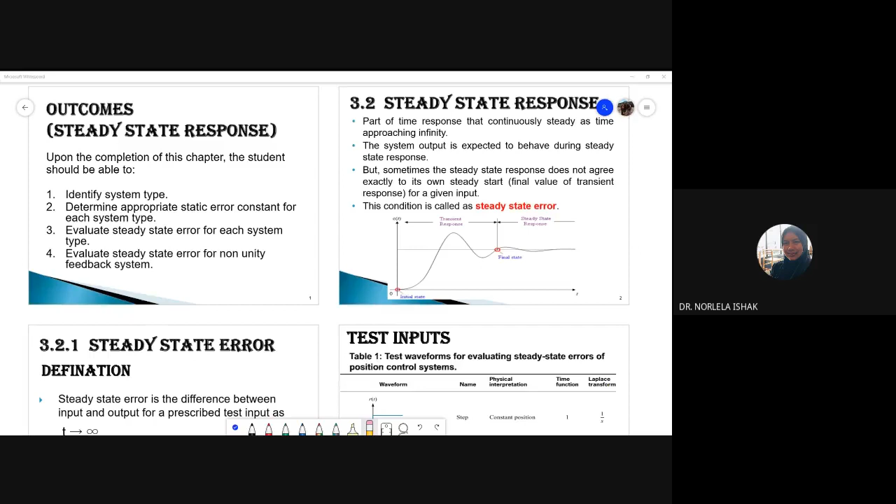Okay, who remembers? What's the parameter we're going to discuss for the second order? Mio, do you remember? Dan, remember? Nani, remember? What parameter do we evaluate from the second order? What's the parameter we evaluate from the second order?

You have to know the settling time, the rise time, the overshoot, the maximum peak, okay, and etc. That's the parameters we're going to evaluate from the second order output response.

Okay, now when we already analyze the transient response part, you have to know the error. Okay, you have to know the error.

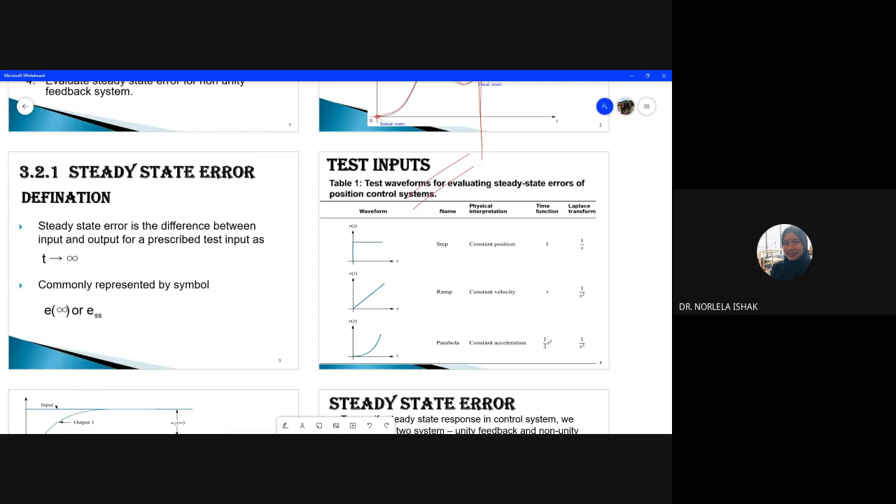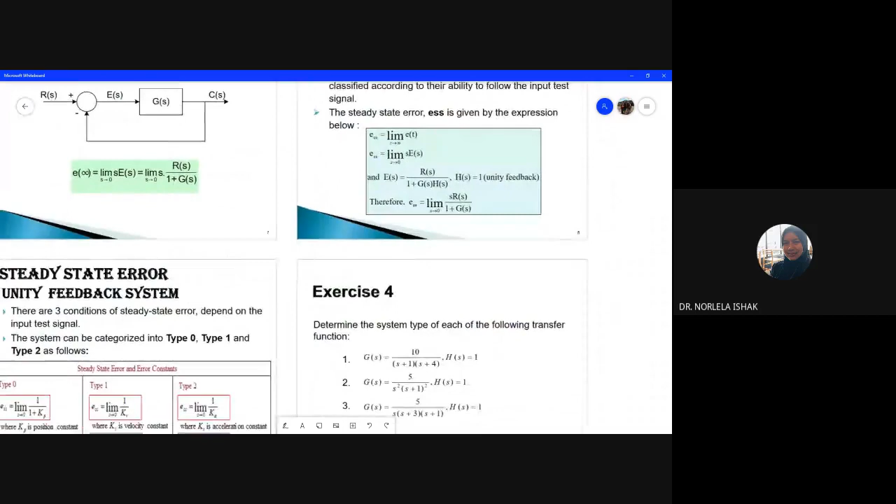Okay, from there, what you should be able to learn from steady state error is you have to identify the system type. To identify the system type, you have to represent your system based on this block diagram. You have to represent your forward gain. What is your forward gain?

This is your forward gain. Okay, this is your forward gain, G(s). Okay, this is your forward gain. So you have to represent your forward gain similar to this general equation.

Okay, so meaning the denominator, you have to represent your system based on this denominator. You have to factorize it. You have to factorize in terms of pole P1, pole P2, and so on. You have to bracket each pole, meaning you have to factorize.

Okay, let's say you have this kind of denominator. You have to factorize it - what is pole 1, what is pole 2, and what is pole 3. From there, you see s to the power of n. What is the n here? That's how you define the system type, right?

Okay, so meaning from slide 17, how do you define the system type? It's the value of n in the denominator. But you have to bear in mind, before you define the value of n, you have to factorize your equation from the denominator.

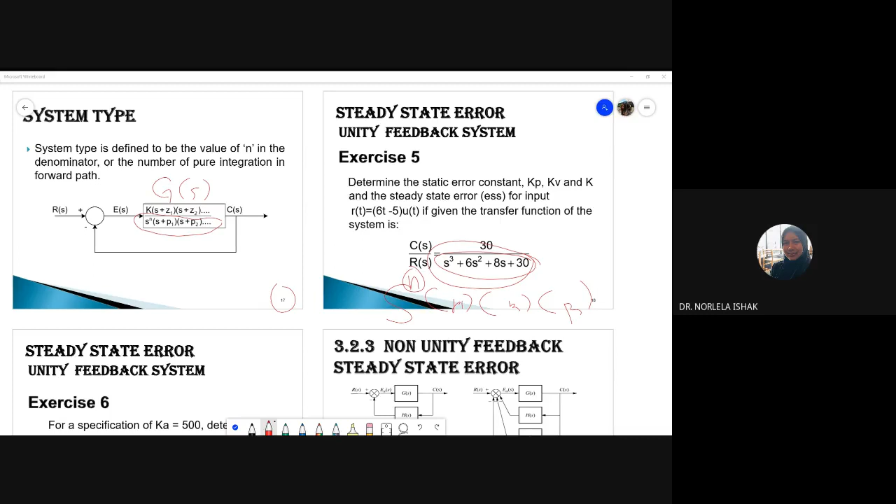Okay, so this is just a summary of what you should know from steady state error. The first one, now you know how to define the system type based on the denominator. But before you define the system type, you have to factorize the denominator equation.

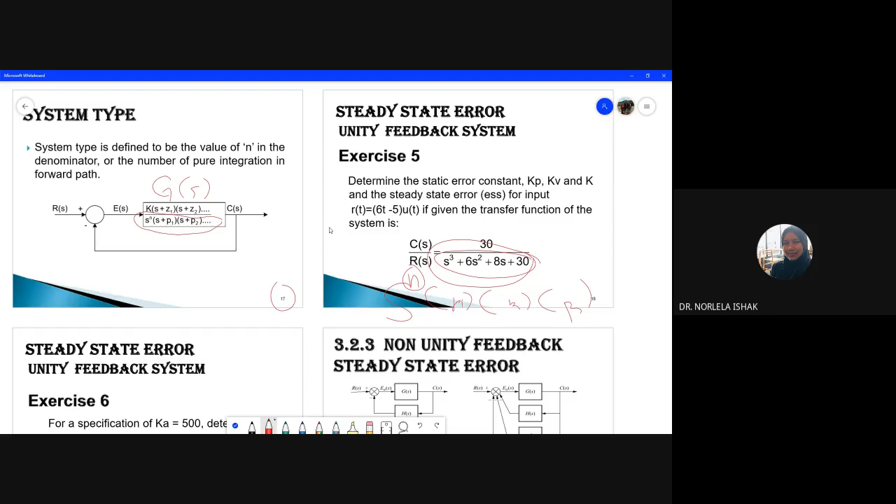Once you define the system type, let's say we already know how to define the system type, whether we have three system types: n equal to 0, n equal to 1, or n equal to 2. We have three types of system type based on the denominator of the forward transfer function.

Once you know the system type, you can determine your static error constant. This is your static error constant. And once you get the static error constant, you can evaluate your error.

Before that, we have two conditions to evaluate our steady state error: non-unity feedback and unity feedback. We have two conditions of closed loop system.

Meaning this is our system, this is our block diagram. This is our input, and this is our output, and this is our forward gain, and this is the feedback — unity, meaning unity when H equal to 1, or non-unity condition when feedback is not equal to 1.

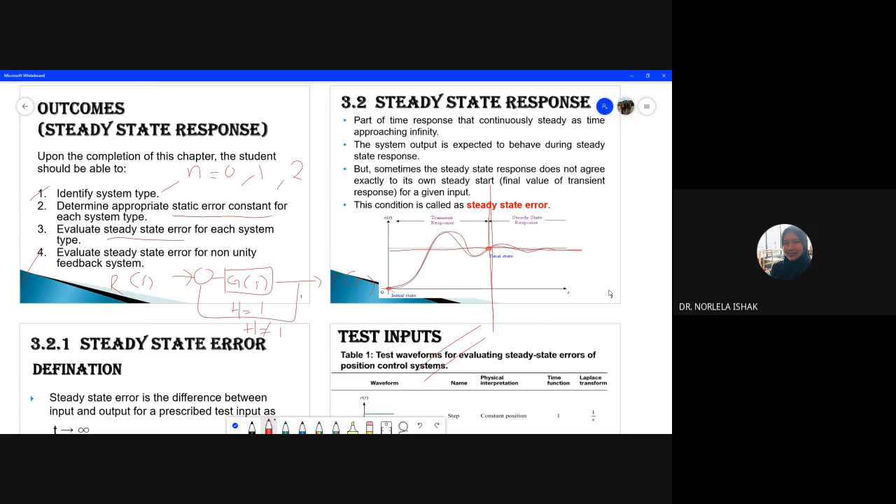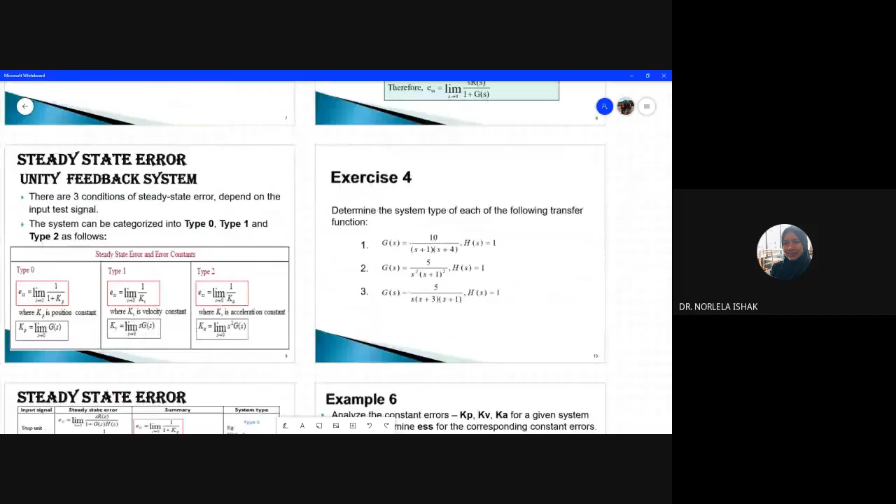So where are we? We're talking about system type: 0, 1, or 2. Once you already know your system type, you can refer to our standard table. This table you can see from the textbook.

This is a standard table. This table shows the relationship between input — we have three inputs in this column — for our input, we will deal with three types of input: step, ramp, and parabola. And then this is type 0, type 1, and type 2, meaning s to the power of 0, s to the power of 1, and s to the power of 2.

This is your n. N represents your system types. Now what is the error constant or steady state error? So you can see from this table, they want to show the relationship if the system is type 0.

If the system is type 0, you can see what is the static error constant and what's the error. Error meaning steady state error, ESS. This is ESS, steady state error.

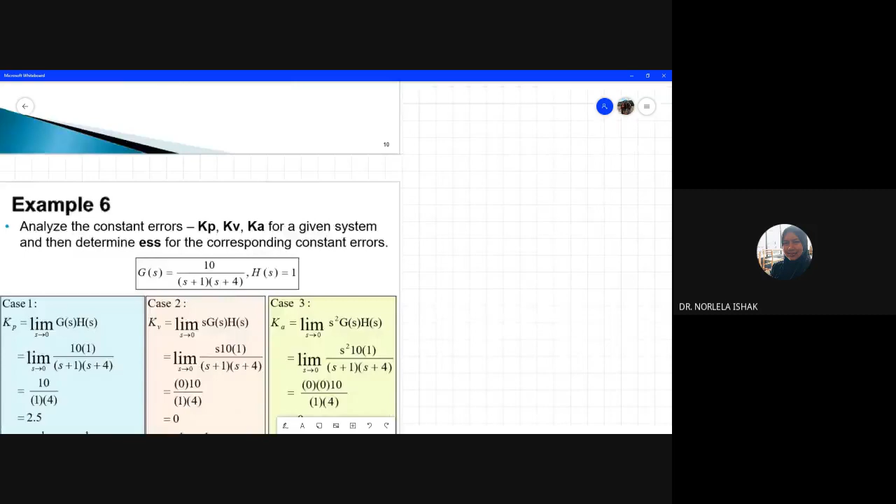What's our error equation? Okay, this is our error equation. And H equals unity feedback. So we substitute into the final value theorem, and we can get this one.

Meaning ESS equals limit S goes to 0 of ES. This is RS over 1 plus GS. R is our input, depending on whether our input is step, ramp or parabola.

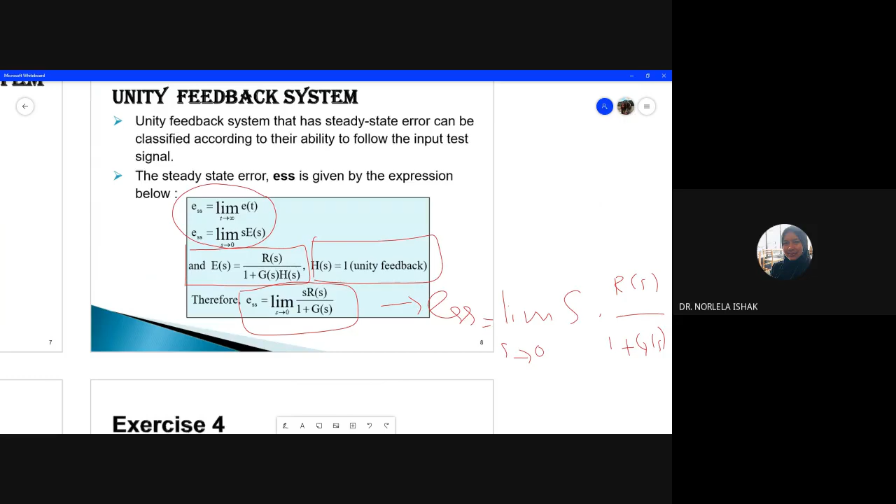Actually, in the second recorded video, I already showed you when we replace or apply the value of R, whether it's step, ramp, or parabola, which is S to the power of 3. We substitute R, whether ramp or parabola, so we can get the equation for error for each input.

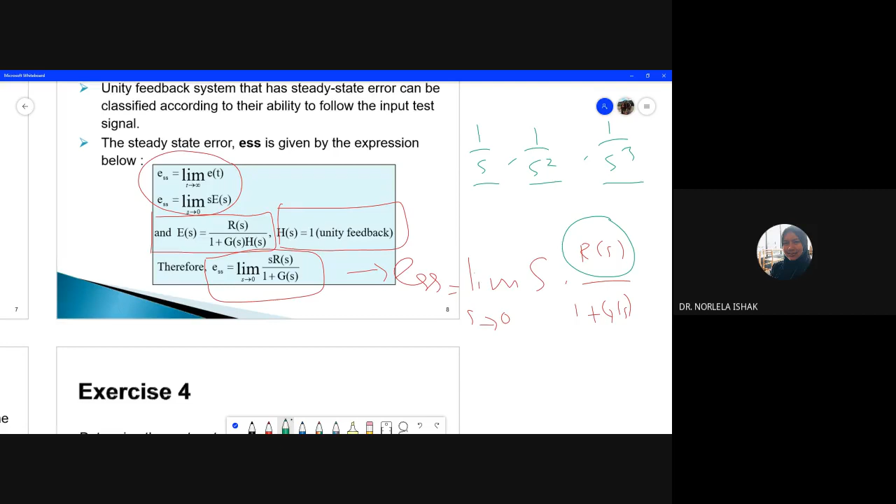You can see that from our recorded video, you can go back through it. Madam already discussed and showed how our steady state error looks like when we apply input with step, with ramp, and with parabola.

So just now, where is our table? From here you can see for type 0 - just now we were talking about type 0. For type 0, only input step will contribute the constant value, Kp.

Kp is a position constant for unit step. Kv is a velocity constant for ramp input. Ka is an acceleration constant when we apply parabola input.

But if the system is type 0, error will be contributed when we apply input step. So now let's say Kp - you already calculate the value of Kp, right? So meaning when you calculate the value of Kp, we can calculate the error. This is the formula for error. First you calculate your Kp, and then once you get the Kp, you substitute into this equation.

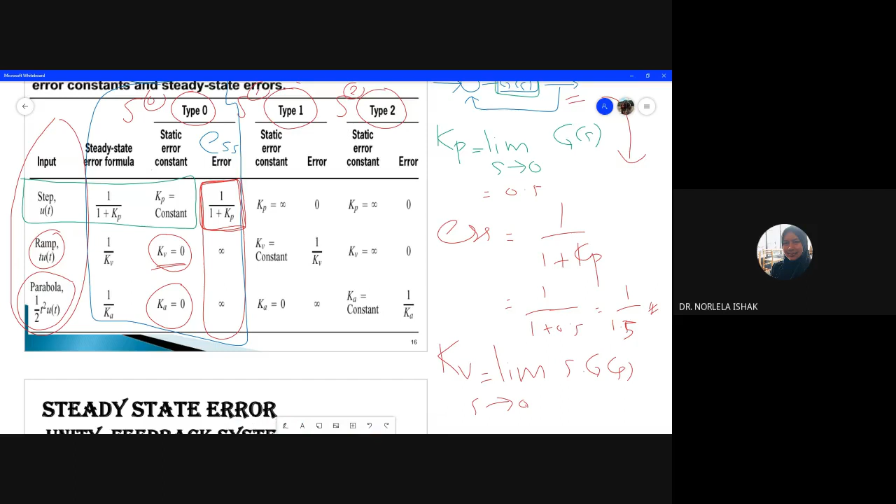Okay, let's say for type 0 and our input is a ramp. When you calculate KV, the formula for KV is SGS. From here you can get the value of KV. KV equals 0. And when you substitute into the steady state error equation for KV, ESS equals 1 over KV. If KV equals 0, of course you get infinity error.

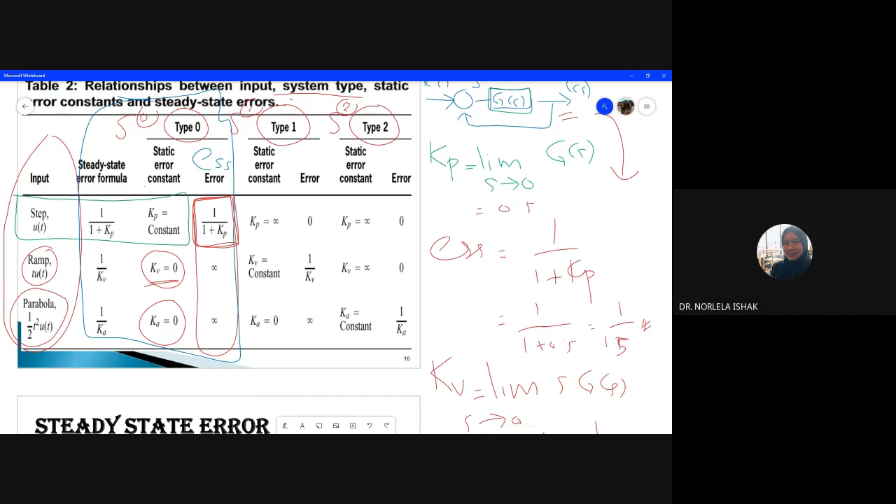Same goes for KA. When we apply input parabola into a type 0 system, meaning if we apply parabola input to type 0, KA you can get 0. You substitute into the steady state error for KA, which is 1 over KA. 1 divided by 0, you get infinity here, for both conditions.

So for type 0, only step input gives you a finite error value; the rest gives you infinity. Same goes for type 1 and type 2. For type 1, error is constant when input is a ramp, and the rest you get error 0 or infinity. Same goes for type 2, meaning n equals 2.

The constant error comes from the parabola input. If the Ka equals a constant, you can get a certain number, so from there you calculate your error, meaning 1 over Ka gives you your error. This constant gives you the number here, for the error when we apply input parabola.

That's the way to read the relationship between input, system type, error constant, and steady state error. This is how this table summarizes or compiles the information to show the relationship between the four parameters.

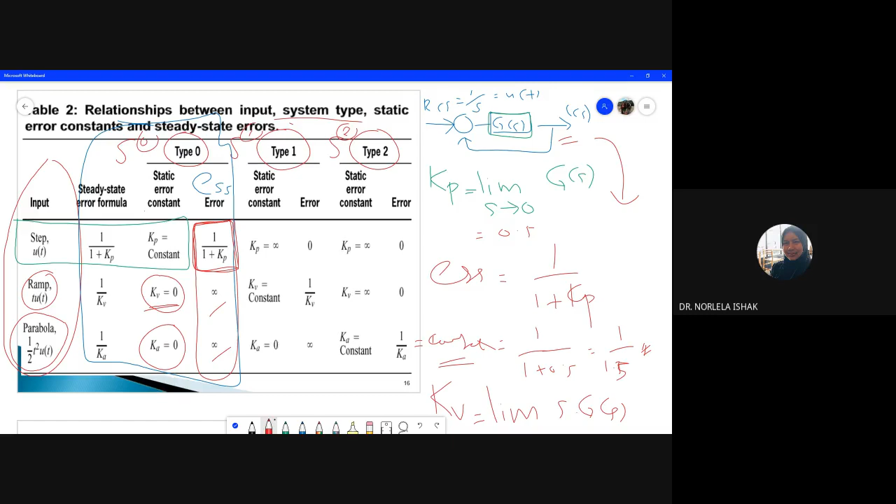Guys, any question? No, madam. Okay, good.

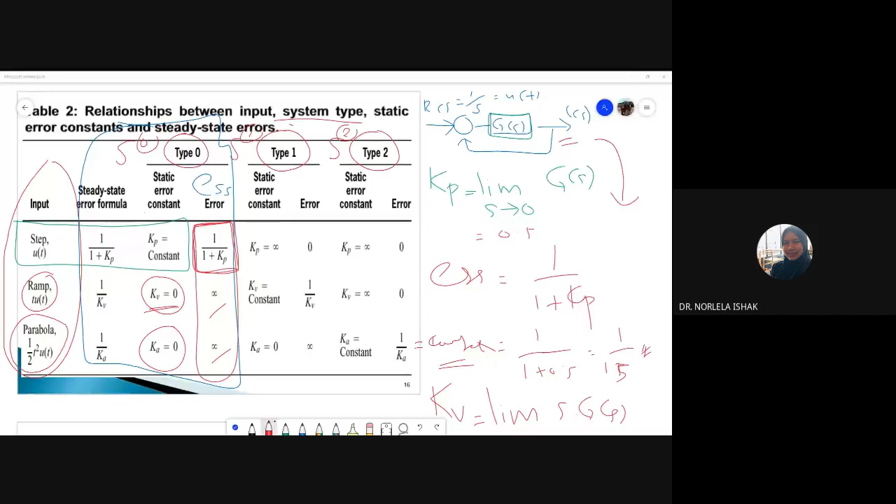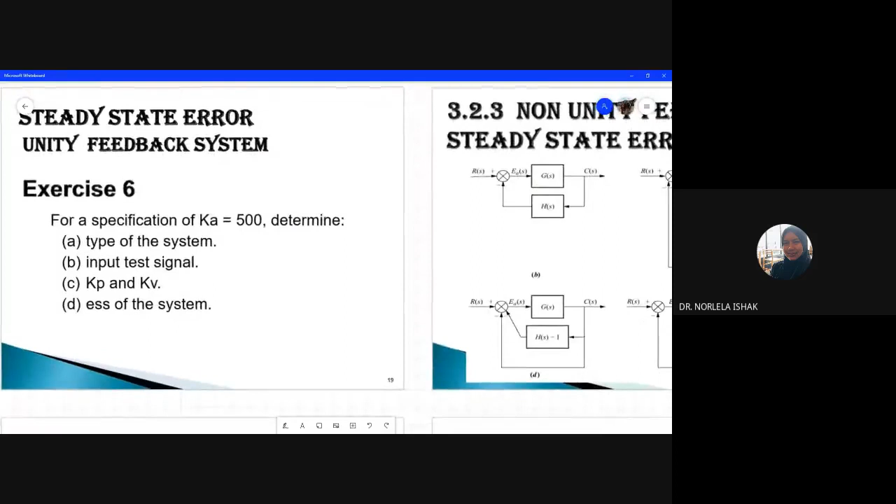Okay, anything I want to share? Any question? Okay, let's say from this one, exercise number 6.

KA equal to 500. Can you determine the type of the system? Who can guess? If KA is given as a constant number, you still remember from the previous table, only one of them, whether type 0, type 1, or type 2, will contribute a constant static value, whether KP, KV, or KA.

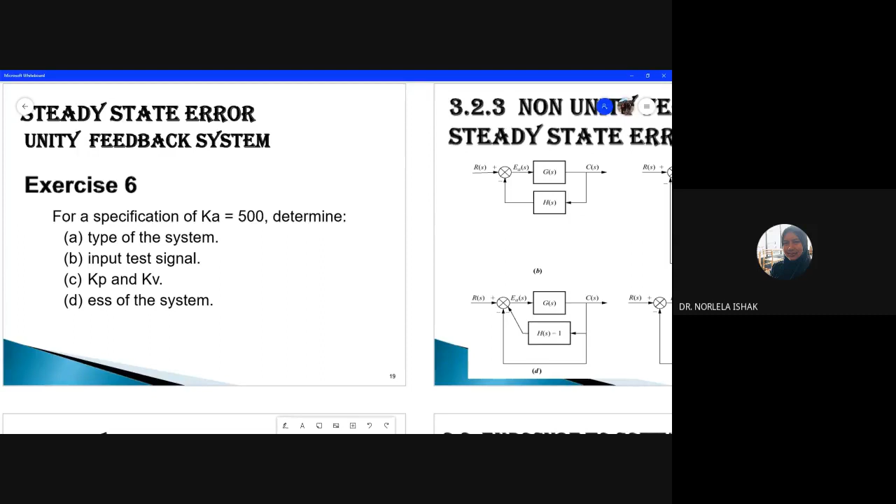For this exercise, KA is a constant number. Can you determine what is your system type here? If KA is constant, it's type 2. Type 2, yes, good. Okay, can we come back to our table here?

So just now, KA has a number. If you see type 0, KA equal to 0. For type 1, KA equal to 0. For type 2, KA has a constant number. Of course, the system is type 2, right?

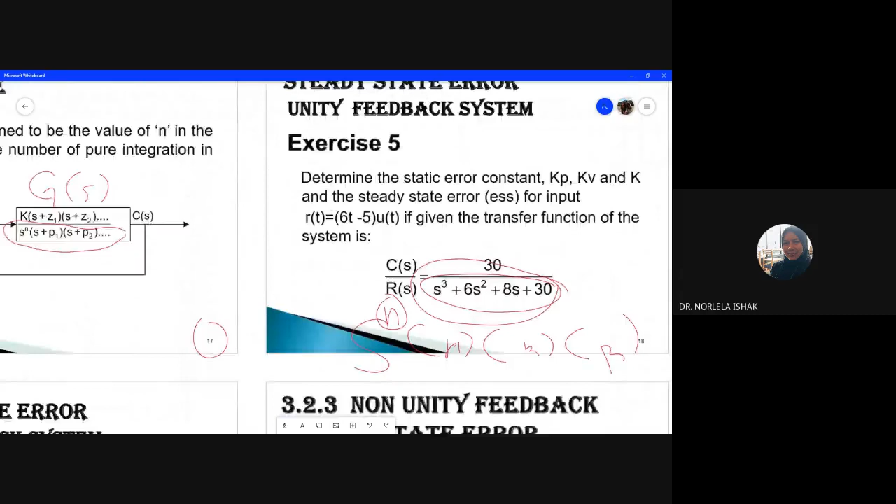Okay, good. And then the next question, what is the input test signal for this system if KA equal to 500? Parabola. Yes, very good, parabola input test signal.

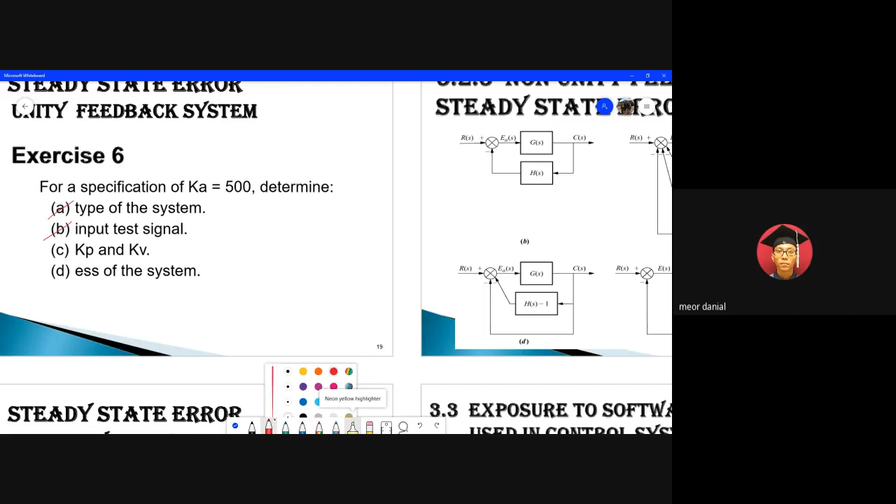So meaning we have a type and we have the input signal. Okay, done. How about the value of KP and KV? When n equal to 2, this is the input, a parabola. How about the value of KP and KV?

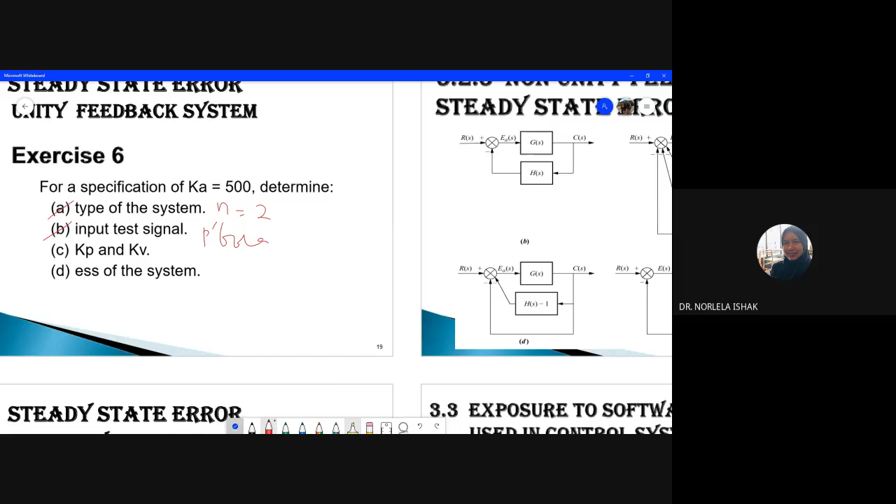Infinity? Okay, let's see back from our table. Type 2, KP and KV is infinity. This is the information from this one. KP and KV is infinity, so of course the error is 0.

Okay, the last one, number D, what's the error of the system? ESS meaning is the steady state error. What's the error for this system? 1/500. Okay good, ESS equal to 1 over KA, meaning 1 over 500.

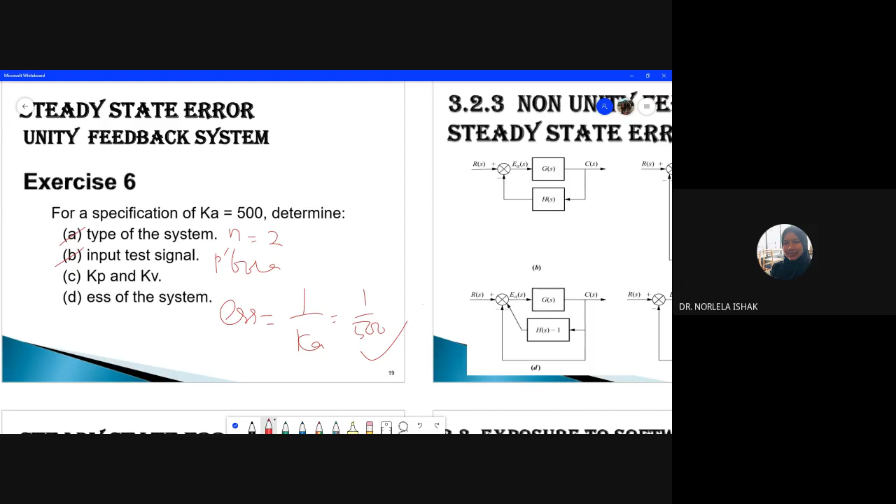This is the error of the system. That's how you should read that summary table, and that table serves as your benchmark. Once you complete your calculation, you can refer back to that table to verify whether your calculation is correct or not.

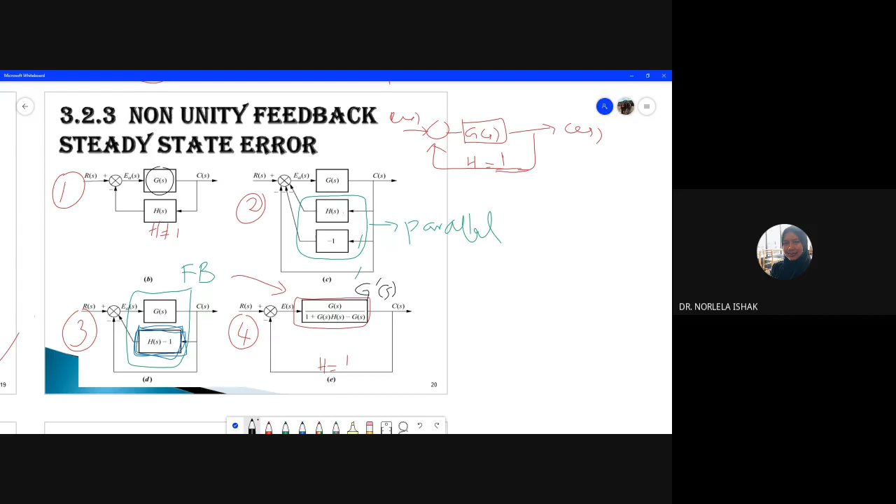This one, madam labels with G prime. This is our G prime. I want to show the difference between this G and this G prime. G prime is after we convert non-unity, G prime is after we convert non-unity into unity feedback. So meaning from here...

We already get our new block. We convert non-unity into unity, so we can get the new one. This is your output, we get G prime here, our new forward gain. This is our old forward gain in what condition? In non-unity feedback. And then now we go step by step until you get this G prime.

So what's the formula for G prime? From the calculation, you can get G prime equal to, inside the box, G, this is your old forward gain, over 1 plus G S H S, minus G. Yes, this is the formula how to get G prime.

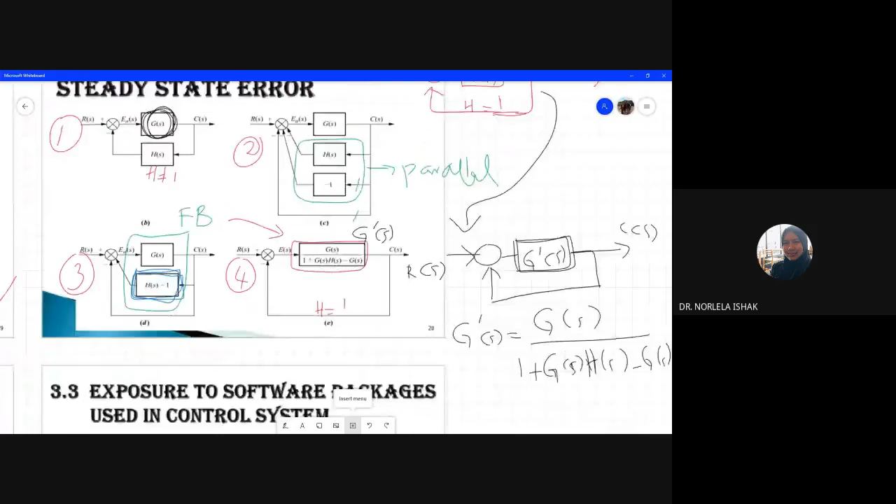This is exercise 7, exercise for non-unity feedback. Hopefully everybody tries it. This is madam's example, meaning H, non-unity feedback system.

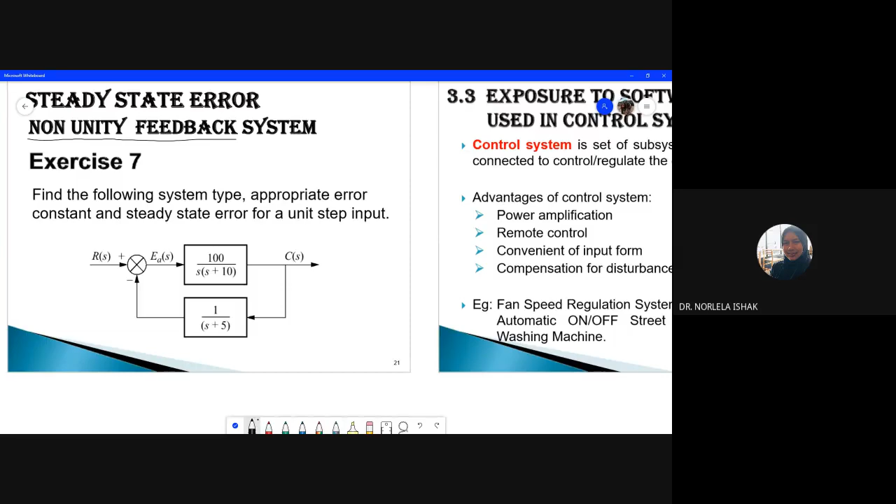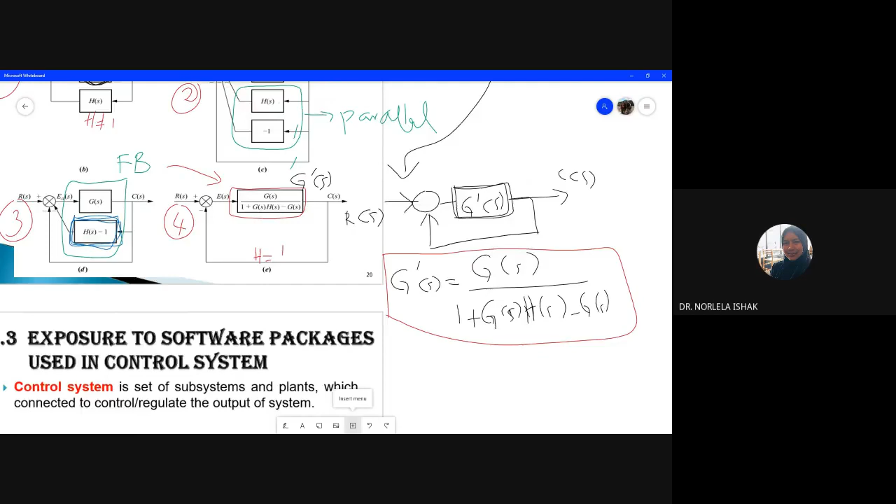So actually guys, if you can memorize the H equation, if you guys can memorize this G prime formula, you don't need to prove step 1 until step 4. You don't need to show it from your solution, you don't need to show back from step 1, you show step 2, 3 and 4. You don't need to show all this process, but you have to remember the formula G prime. What's the formula for G prime? G over 1 plus G multiply H, minus G. That's the formula G prime.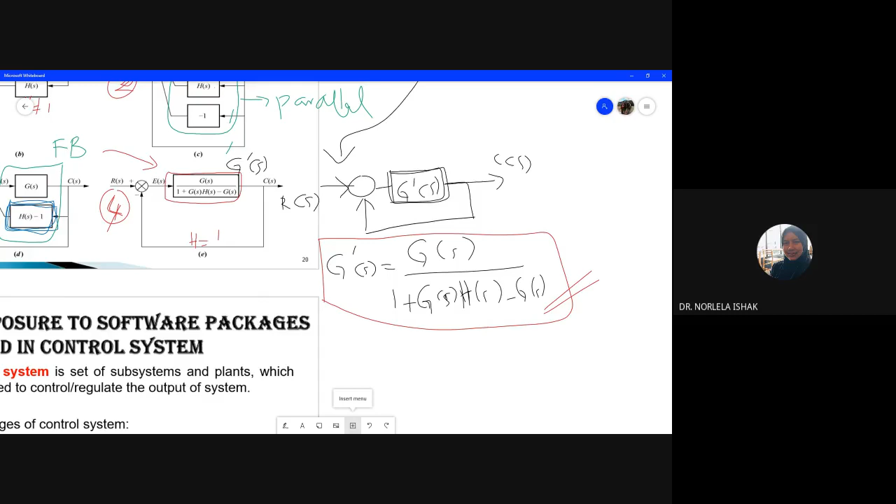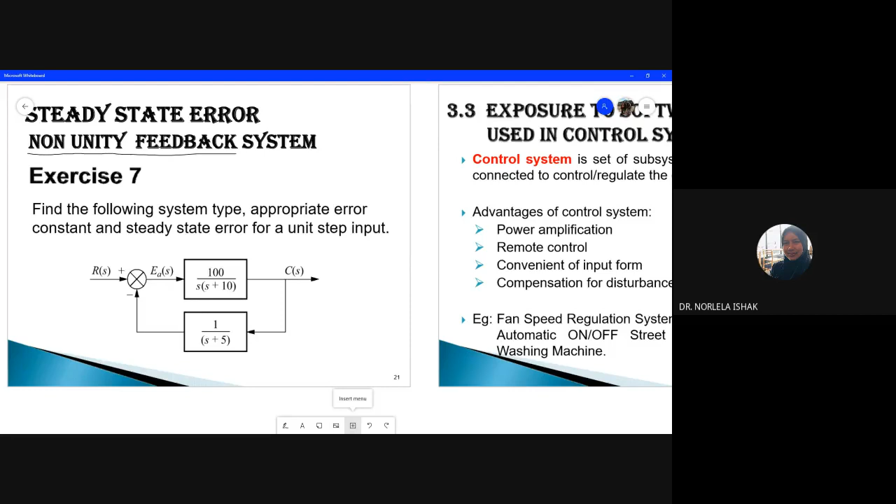So meaning for exercise 7, you have to define your G prime here. What is your G prime? You have to write down what is your G prime. Let's say this one is our system, a non-unity feedback. Non-unity feedback means you have to define the unity feedback, right?

This is our output and this is our input, and then this is our G prime, equal to, just now what's the formula? G S over 1 plus G S H S, minus G S. So we already convert into unity feedback.

So from here you determine your system type, whether 0, 1 or 2. Next you have to calculate whether your KA, KV or KP. From here you determine your error, so the last one you determine what's the error, contributed from where, from KA, KP or KV. That's the overview of how to solve exercise 7.

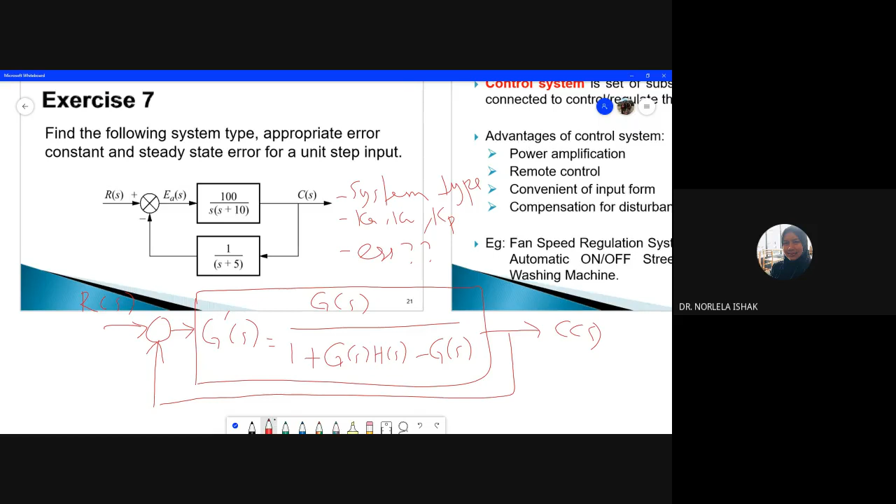Any question? Any question? Madam wants to hear. Everybody clear? Yes, clear. Yes, madam. Okay, okay, very good.

Din, boleh follow tak? Mana balung? Okey, Balung ada ke boleh. Tak ada ni? Ada. Okay, very good. Boleh. Okay, so after this, Madam nak you all try.

After we finish our ODL, I need everybody to try all the exercises in this slide.

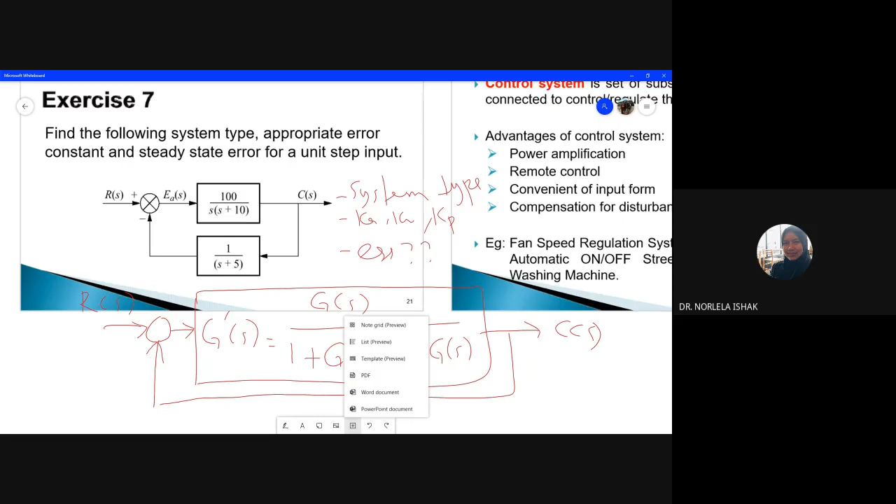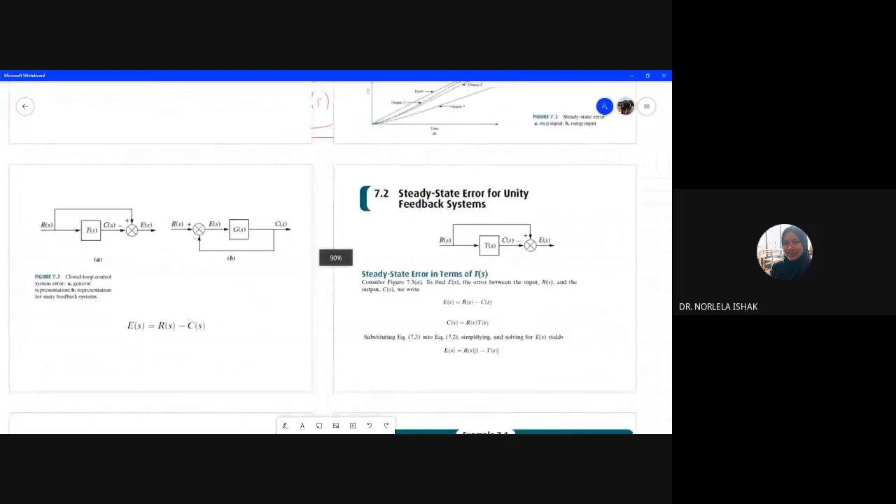Okay, now Madam nak come back to another, ada extra notes tu. Okay, sekejap. This one. Okay, this is apa yang Madam nak tunjukkan. Oh, saya tak potong kat belakang. Kejap kejap ya. Nama tampal pula kat sini. Okay, extra notes. Okay. Still recording.

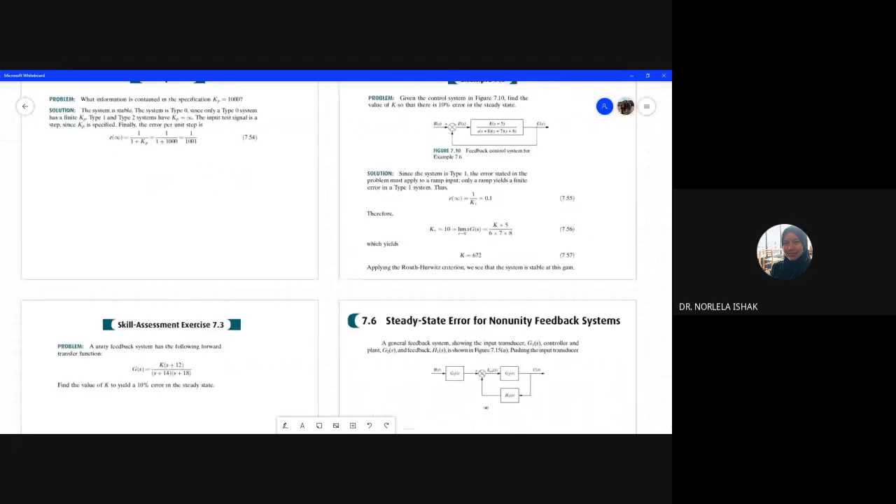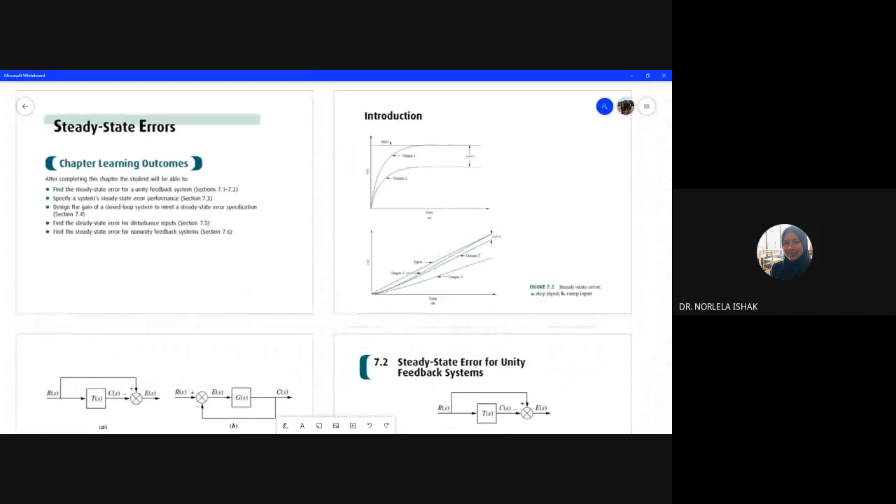Nampak tak slide baru ni? Takut this is salah lagi. Nampak tak slide baru? Nampak. This is another. Okay, this is actually Madam nak tunjuk.

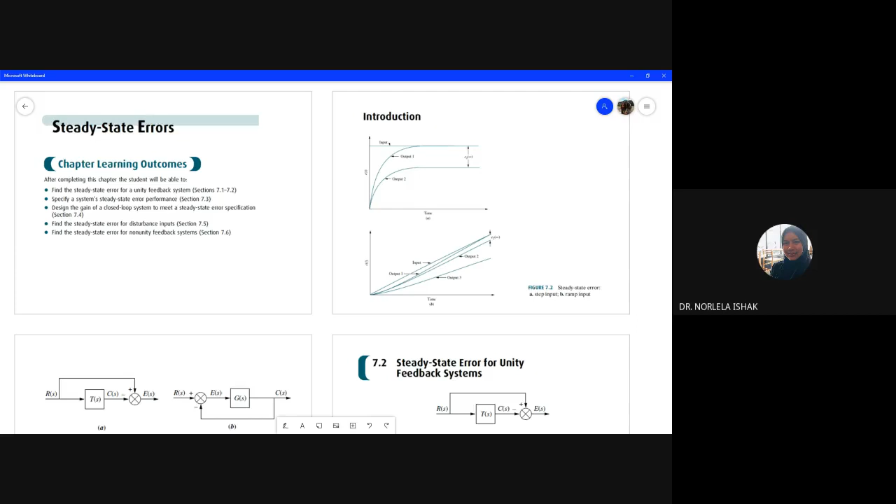To calculate the error, kita boleh represent sistem kita unity feedback. Tapi kita boleh kira our steady state error in two conditions, in two terms. Whether we want to calculate in GS term, okay, just now is in GS term. Okay, and then this is Madam nak tunjuk sikit aja, very simple, how to calculate the error in term of TS. Okay, in term of TS.

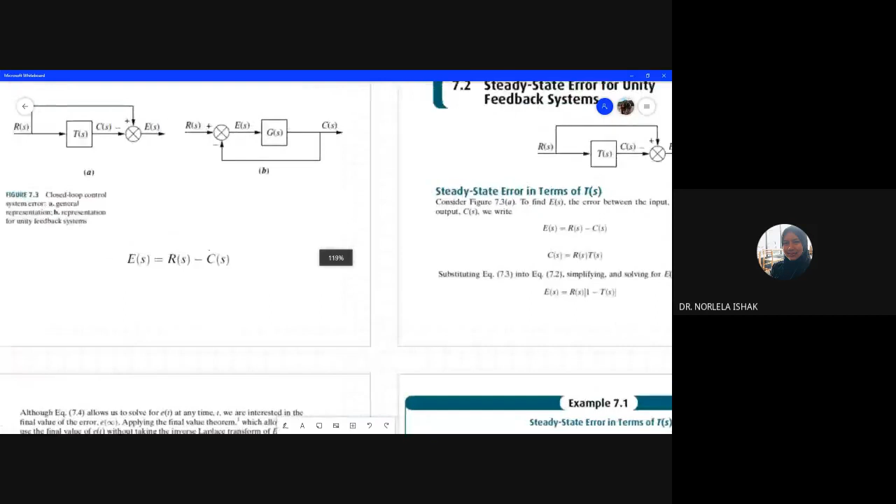This is the block diagram slide. Okay, just now I share how to calculate the steady state error in term of GS.

If the question gives you this block diagram, you have to calculate the error in term of GS. If the question gives you this block diagram, you have to calculate the error in term of TS. Okay, ni ada dua condition tau, and then jangan confuse.

Okay, we have two types of closed loop system error. You can see from this figure. Closed loop control system error. A is a general representation. B, we represent our block diagram for unity feedback system.

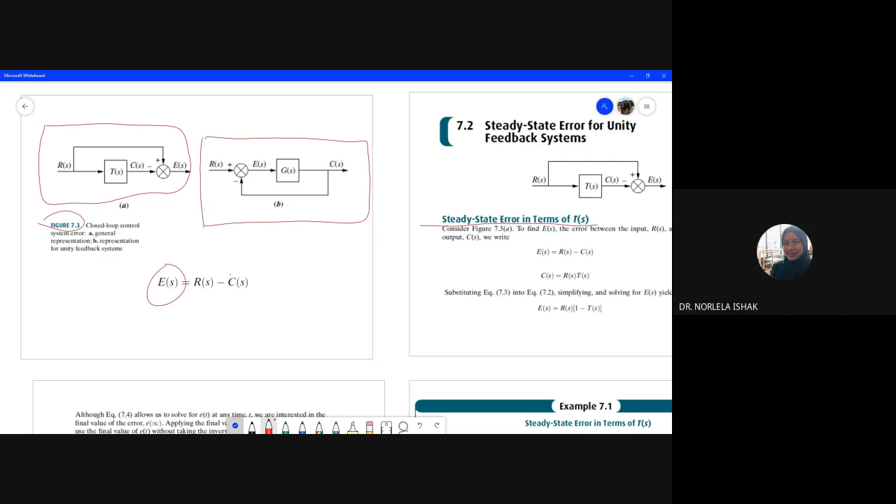And then the error equation for E is also different for both terms, whether T or GS. So for T, let Madam just scan through a bit, very fast. What's the steady state error in terms of TS? This is I want to show or prove how we get the equation for E. Macam mana kita nak kira E tu? How we calculate the equation for error from this block diagram.

Error is here. How to calculate the error? Error is input minus output. You can get equation number 1. Okay, what is C? C is T multiply dengan this input, right?

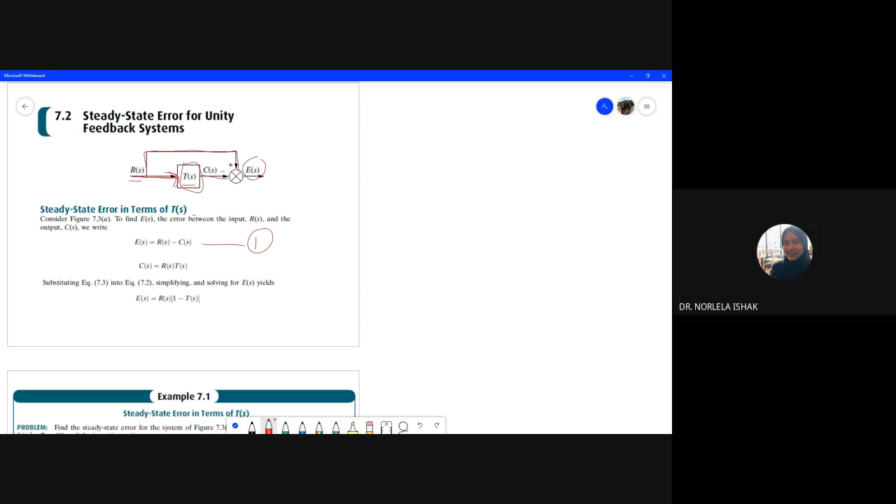Sorry, this is a signal. Enter this block, we can get C. So we can get equation number 2. And then from equation number 2, you substitute into equation number 1. So kita dapatlah equation number 3. This is how we want to get the error using the TS term.

Okay, so bear in mind kita ada dua. Kita kira error based on T term, ataupun kita nak kira error in GS term. Okay, this is for TS in term of TS. Okay, this is what the block diagram looks like.

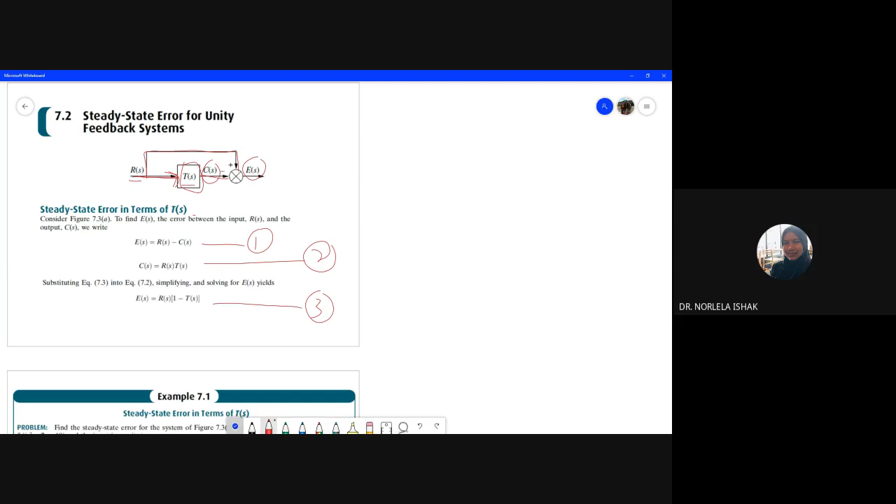Okay, so let's say kalau you tengok, still using final value theorem juga. We borrow final value theorem to calculate the error. Okay, we still use this equation. What's the error? What's the error just now?

We substitute the error equation here. We use final value theorem. Error - this is our error just now, right? This is our error equation.

So we substitute error into final value theorem. So we can get error at T, meaning T is approaching infinity. And limit S goes to infinity - we normally apply S goes to 0. And then S multiply with E. So E is our error equation we discussed before. We substitute, so we can get the error equation in final value theorem.

Okay, let's say example 7.1. From example 7.1, how to calculate steady state error in terms of T. Okay, just now from this equation, they provide to you the transfer function for T. What's the transfer function for T? TS equal to 5 over s square plus 7s plus 10. This is the transfer function for that block.

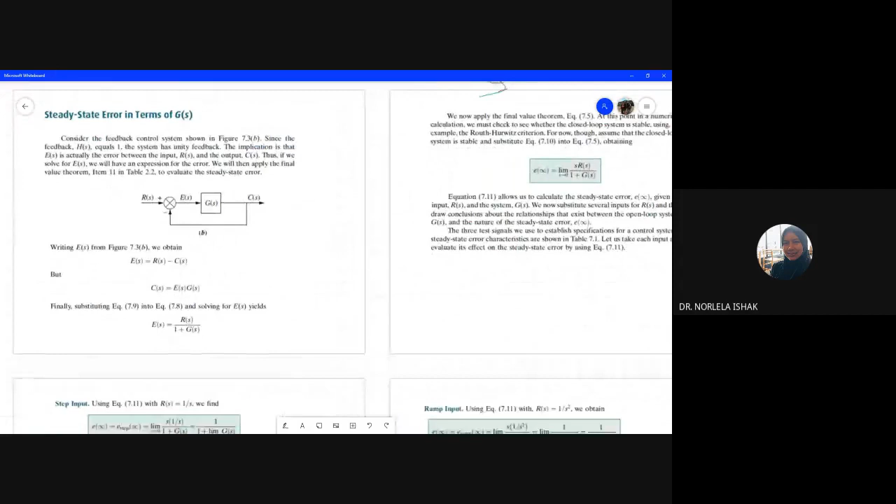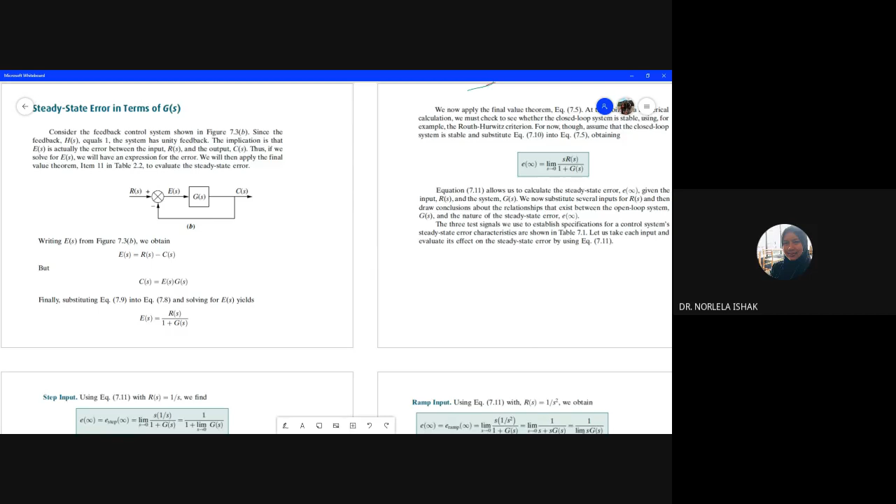Okay, so yang ini steady state error in terms of G, yang macam as looks like yang whatever yang madam already discuss, later okay. From this slide, okay, this is yang madam mention tadi lah. Okay, they give you input, you substitute into the final value theorem, so you akan dapat this one. Okay, ni yang dia panggilkan KP. If the input R kan, KP you akan dapat constant, betul tak? You can get constant number.

This is this slide, they want to show how to get KP value. Okay, how to get the KP value? From here, meaning E(S) equal to 1 over 1 plus KP. Okay, this is KP, right? 1 plus KP. Okay, and same goes to the previous.

The next slide is when the input is a ramp. Okay, when the input equal to ramp, or when we give ramp input to the system, so you can simplify the equation until you can get the last one, equal to 1 over, for input ramp is what? KV, 1 over KV. Okay? And then this is 1 over KV.

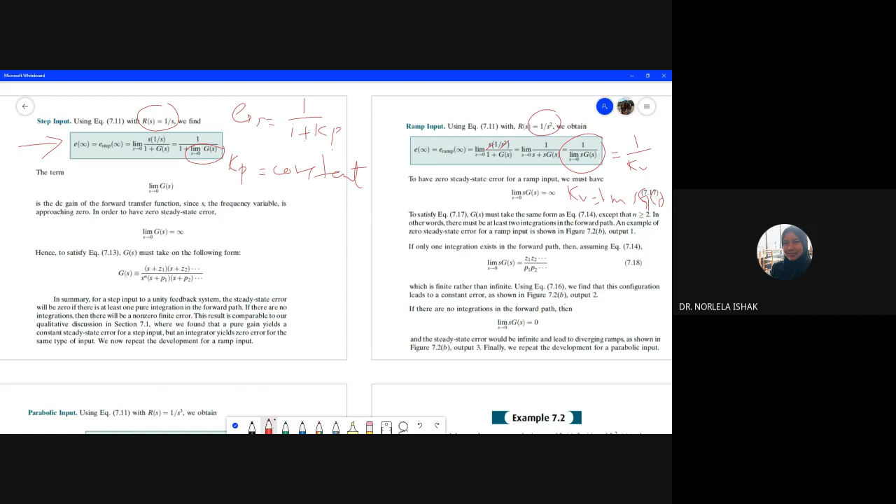Okay, from this slide or from this note, I want to show you, I want to show you apa ya? I want to show you how the equation for Kp, Kv, and Ka derived, okay, from the final value theorem equation with three type of input: step, ramp, and parabola.

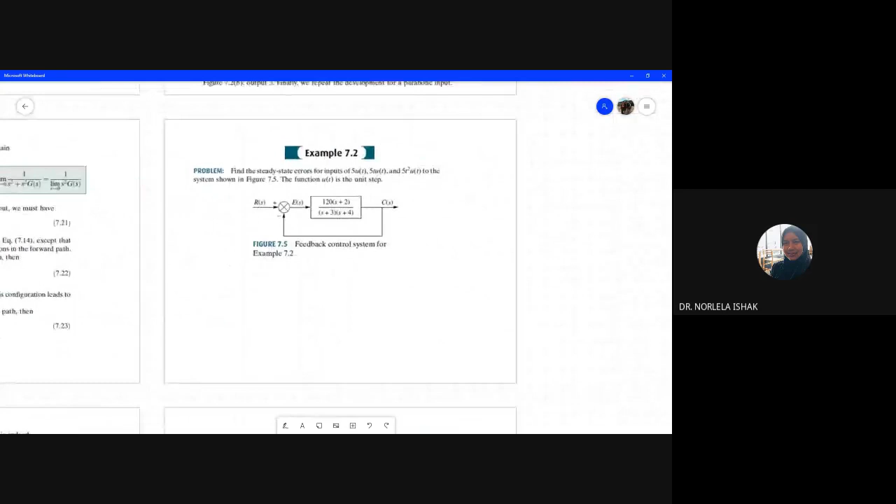Okay, and then this one, example 7.2. Siapa dah cuba? This is, we analyze steady-state error in term of G. Okay, so macam mana nak buat? So now your system already in unity feedback. Okay, just now they say find the steady-state error for input 5 u(t), 5t u(t), and 5t squared u(t). And then they give the forward gain 120 times S plus 2 over S plus 3, S plus 4.

Siapa dah cuba example 7.2? Siapa dah cuba this example or this exercise? Belum, tak try lagi? Belum. Kenapa? Jumaat kan kita tak ada kelas. Kenapa tak cuba? Itu kan madam bagi nota lambat, dia bagi lambat. Betul terus tak tengok, Isnin cuti. Kenapa tak tengok? Saya siapkan English, English kena hantar kerja. Alasan, okay, so cubalah sekarang.

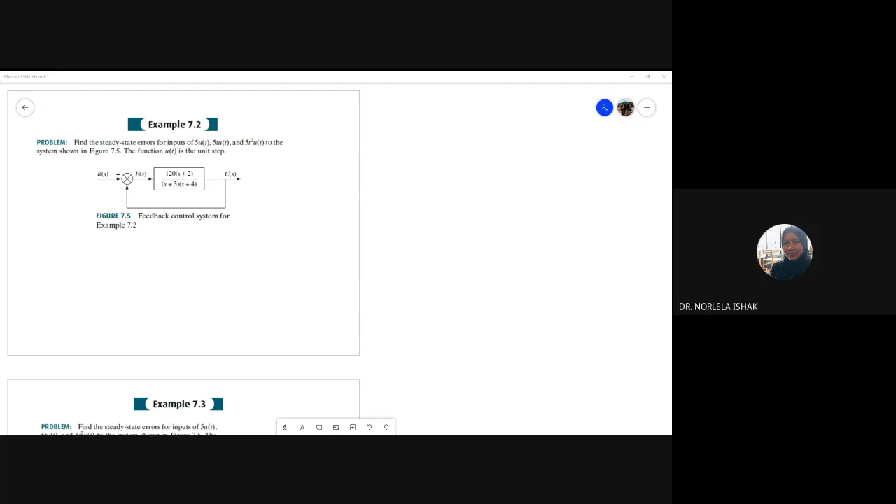Macam mana nak buat? Cuba, let's try now, okay everybody. Madam nak you all cuba, dia nak buat final nanti ni. So let's try this one, example 7.2, cepat, let's try this example. Apa sistem type dia?

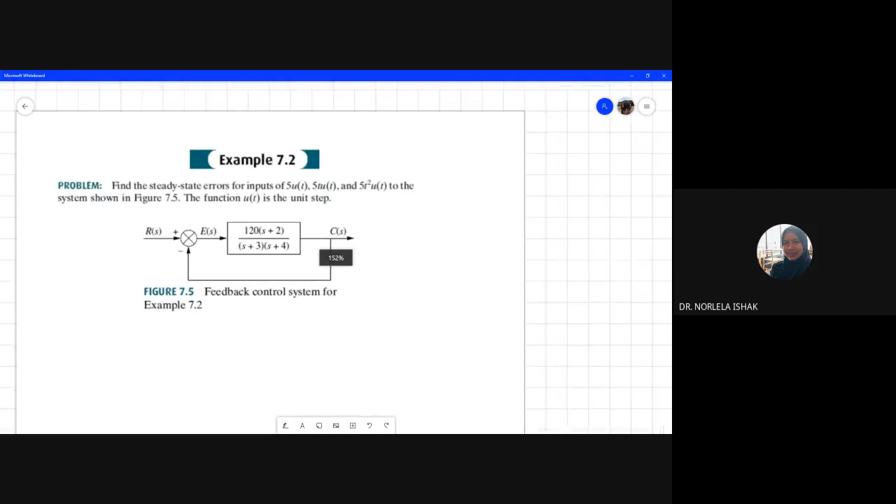What's the system type for this example? Type 0, very good. Meaning we see from the forward gain, from the denominator of the forward gain, right? Here, S to the N. So meaning S^N, if N equal to 0, meaning you get 1, kan? Let's say depan ni 1, okay so N equal to 0. Very good. So disuruh cari apa ni?

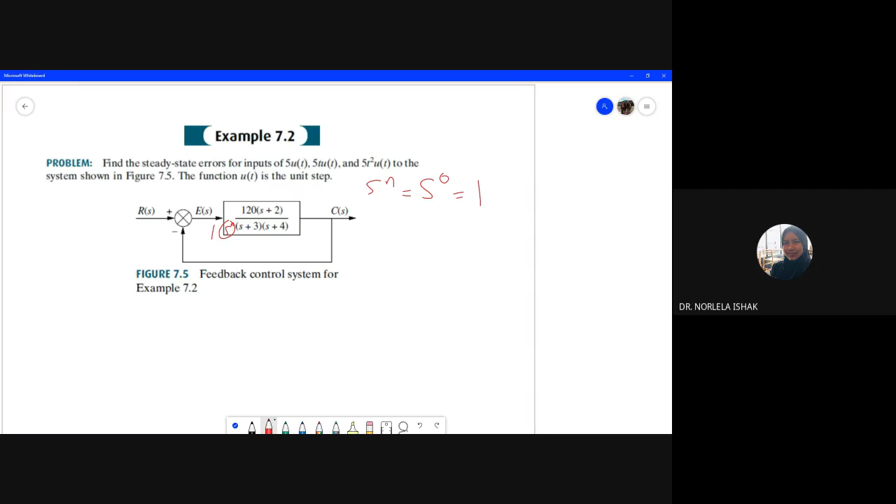Find the steady state error for input 5. 5 is a magnitude. Normally a step is UT kan? Kalau ramp is TUT. Betul tak? This is a general equation. And then for parabola is half T square UT. This is a general equation for step, for ramp, and for parabola. Just now they give you 5. 5 is the magnitude for the input, right?

Okay, for type 0, what's the appropriate error constant? KP, KA, KV? KP. Very good. You can get KP. So for KP, which input boleh dapatkan constant tu? From step, from ramp, or from parabola? Step. Very good, from step.

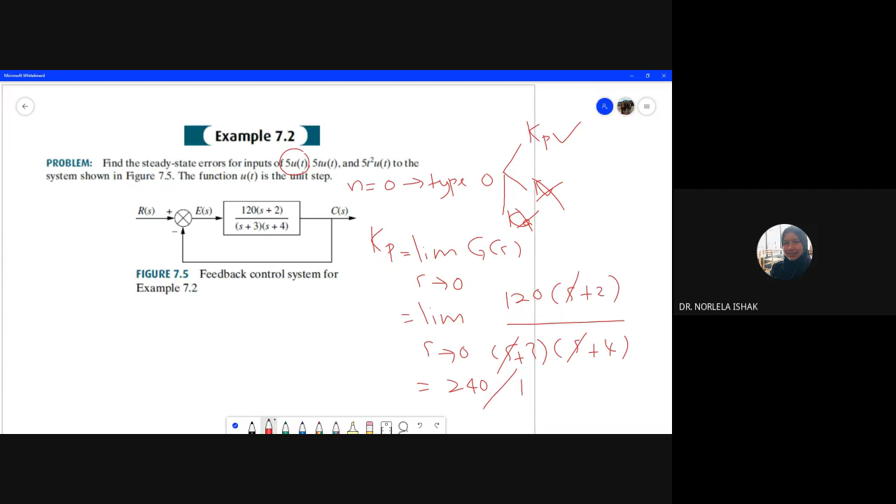So how to calculate the KP? Macam mana nak kira KP? What's the equation for KP? Limit S goes to 0, GS kan? Betul? Okay, so kita substitutekan equation dekat dalam equation ni. What's your G? It's 120, S plus 2, and S plus 3, and S plus 4. Okay ni semua jadi kosong kan, this one 0, and this is 0. So meaning you can get 240 bahagi dengan 12, kan? Betul tak Din? 240 bagi 12, itu adalah your KP. Betul ke? Ya, betul, 12.

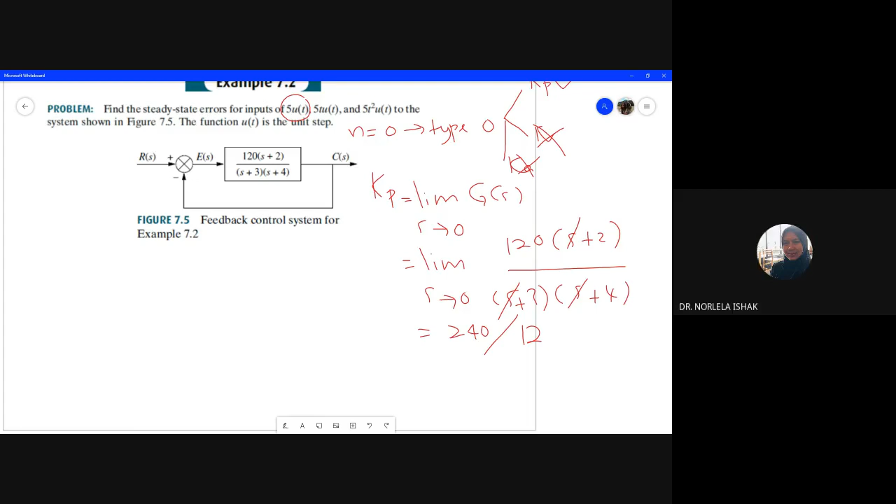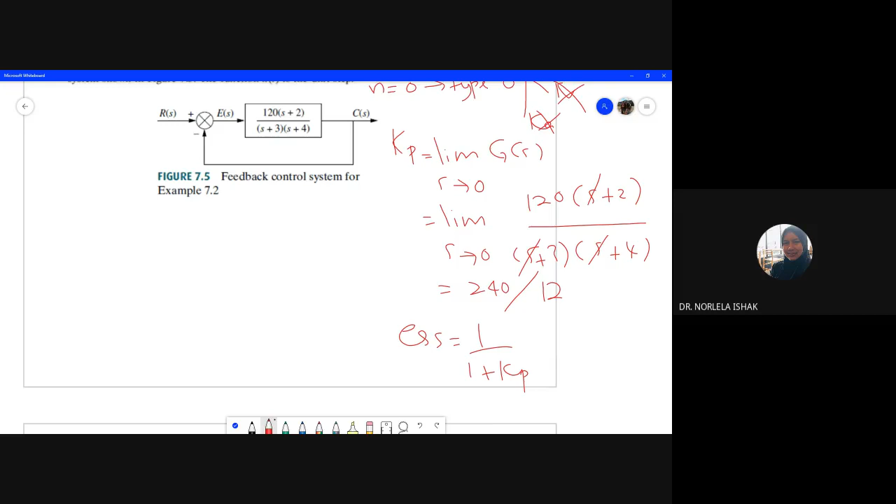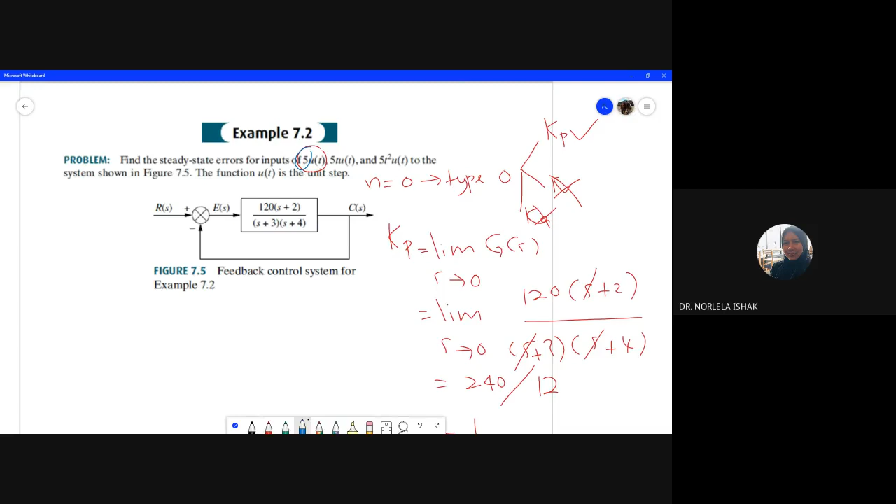Okay good. Now once you get KP, kena kira lah dia punya error, ESS kan? So what's the formula ESS? ESS sama dengan formula dia apa? 1 over 1 plus KP, kan? Yes. But you have to remember apa dia punya magnitude input tadi, 5, jangan lupa 5 ni. So you have to put in your calculation error magnitude 5 tu. So how to calculate kalau magnitude dia bagi 5?

So how to calculate? This is the way. This one 5 letak kat depan, so masukkan ni dekat dalam kurungan KP. Equal to 5, apa tadi, 1 plus 240 over 12. So that's the way how to calculate error when they give magnitude not equal to 1. Ada soalan tak? So kiralah ni, dapat berapa? Senang je kan?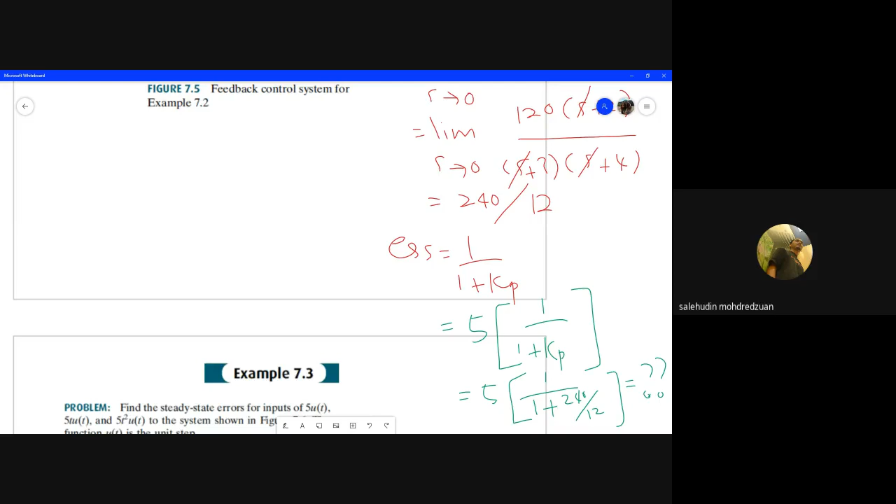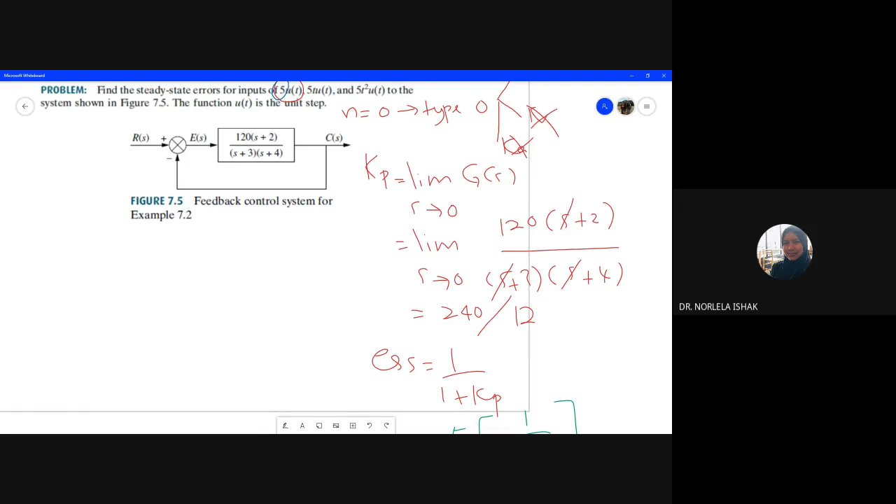Nak tanya sikit, yang KP, nak cari KP, dia punya formula limit GS saja, bukan GSHS? H tu 1, tak payahlah kira. Oh okay, tak, okay. Tu saja, that's the way, that's how to calculate the error. If you already know the system type, so we directly calculate the appropriate error constant.

Meaning now you will be given type 0, the appropriate constant only KP. Tak salah you all nak kira KV or KA, boleh kira KV and KA. You can calculate KV and KA, but you can get unconstant number, whether you can get 0 or you can get infinity.

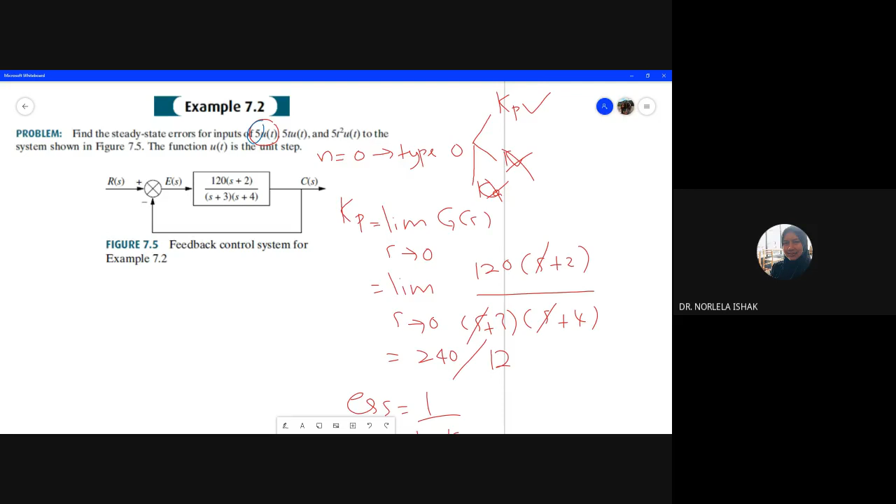Okay, let's try 5 TUT as an example. Let's try this one. We don't know for type 0 which constant, KA, KP, KV? If you don't know which one contribute the constant number, you have to try for all types. You have to calculate your KP, you have to calculate your KV, and you have to calculate your KA. So let's say we don't know the constant contribute from which static constant, KP, KV or KA. Just now we already try for 5 UT.

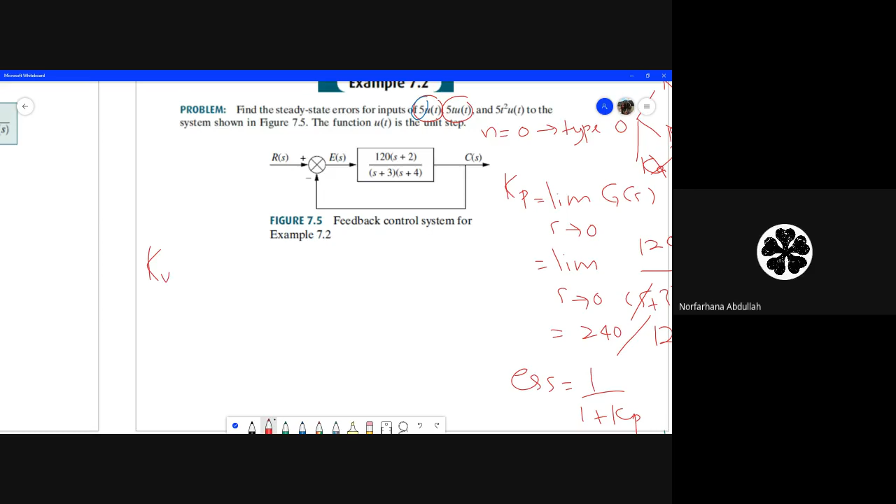Now we try for 5 TUT, meaning KV or KA. Nak kira apa kalau kita nak kira ramp? Ramp, KA ke KP? Sorry, KA ke KV? KV kan? Betul? Betul ke? Betul. KV, apa formula dia? KV, S goes to 0, S multiply dengan GS kan? Betul tak? So we rewrite back our equation.

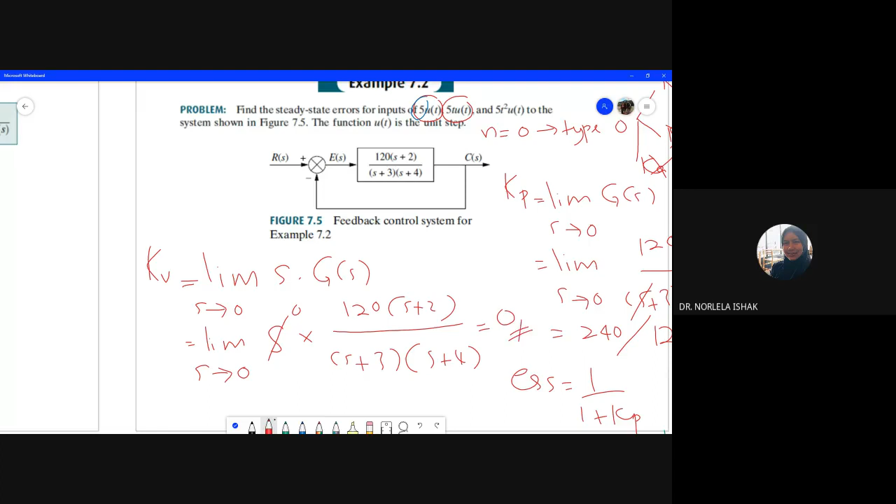S multiply with the 120, over S plus 2, darab nah, S times 3, plus 3, S plus 4. So dapat apa kat sini? Dapat apa ni? Ni dah jadi kosong kan, 0 multiply with the rest, you can get apa? 0 kan? Okay good, 0, you can get 0. Okay, you can get KV 0. Okay, you can get KV 0.

What's the error? Apa error dia, Syah? Error sama dengan apa, magnitude dia tadi 5, 1 over KV, right? Equal to 5, 1 over 0. Mak over 0, infinity kan? 5 darab infinity, sama dengan apa? Infinity. Okay, that's the way kalau kita kira untuk semua constant.

Okay, let's say we try another one. Apa another one? Apa lagi satu? Parabola kan? Okay, parabola 5T square UT. So let's say kita kira lagi satu tu. Mana media nak gerakkan benda ni? Okay, let's say kita nak kira untuk parabola input.

Okay, parabola input apa? Ka equal to limit s goes to 0, s squared. So ini sama dengan limit s goes to 0, s squared multiply dengan transfer function tadi, 120 s plus 2 s plus 3 s plus 4.

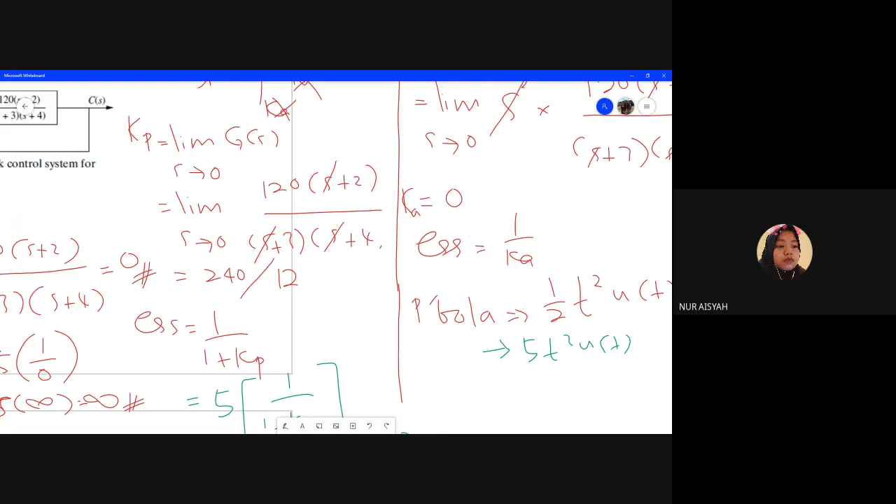Parabola. Okay, parabola equation dia sama dengan half t square ut kan? Betul tak? Ya, betul. Okay, so dalam soalan tu, they give you 5 t square ut. Dekat sini parabola ni ada trik sikit. Betul tak? Boleh tak terus pakai equation ni, 5t square ut? Boleh ke tak boleh? Kita punya general equation kita adalah ini.

Sebenarnya, dia sama dengan apa magnitude dia tu? Siapa boleh nampak? Berapa sebenarnya magnitude? 5/2? Salah. Apa sebenar dia? Tapi general equation ini, berapa sebenar magnitude? 2.5, setengah? Salah. Half daripada 5 kot, berapa? 2.5? Bukan. Asal dia, sebelum kita darab dengan half tu berapa untuk dapat 5? 10, yes, very good.

Okay Lasha, Madam bagi duit raya RM10. Yay! Wah. 10 darab setengah kan? t square UT, dapatlah 5.

Macam ni. This is considered a trick kalau kita buat, kalau dia bagi parabola input tau. Selalu student tak boleh buat yang ni. So you have to bear in mind ini adalah dia punya general equation. Okay, dia bagi 5, sebenarnya yang asal dia adalah 10.

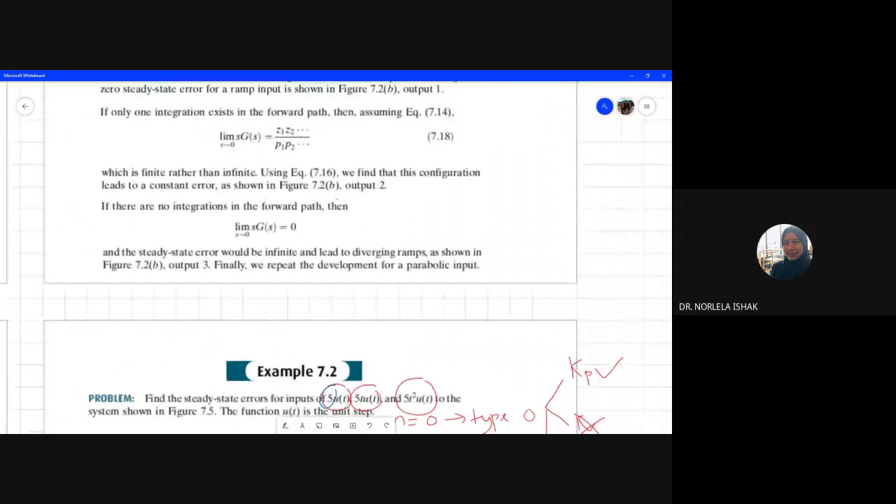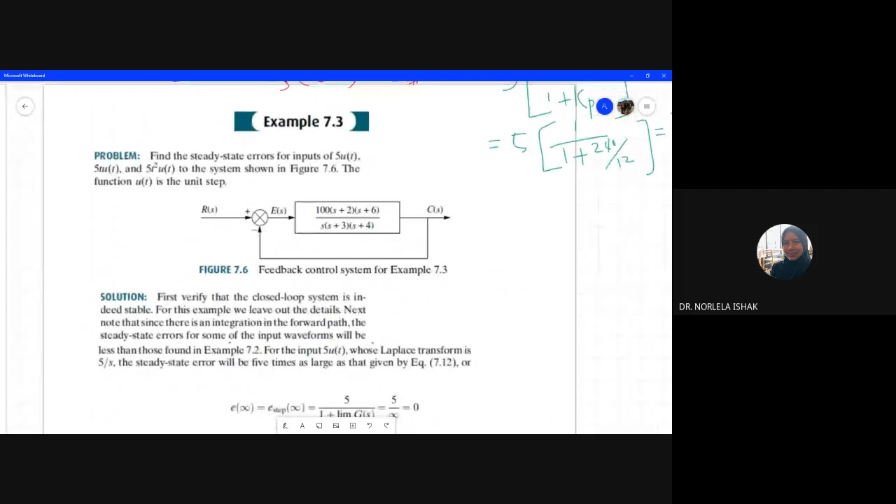Cewa. Okay, ada soalan? Ada soalan tak? Aisyah jangan lupa share number nak transfer duit raya. Malu tak? Okay, siapa ada soalan? Tak ada.

Tak ada soalan, madam boleh bagi kuis lah macam ni. Okay, any question? Brian, Carlos, any question? Mark Joshua, none. So far so good? So far so good. Wow, very good. Carlos, are you there? Carlos, are you with me? Where Carlos? Senyap je ni.

So, apa lagi? Let's finish our chapter time domain. We already discussed transient response and now we are already covered on steady state error. Okay, we have another 2 chapter to complete our syllabus.

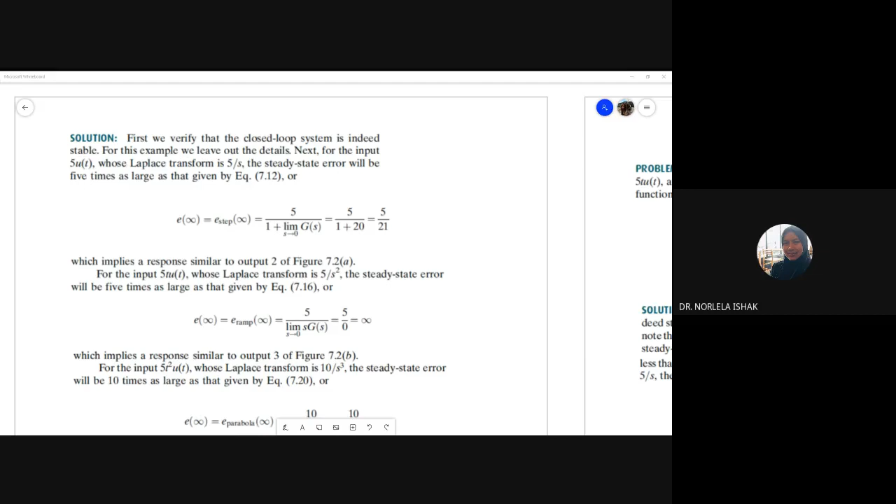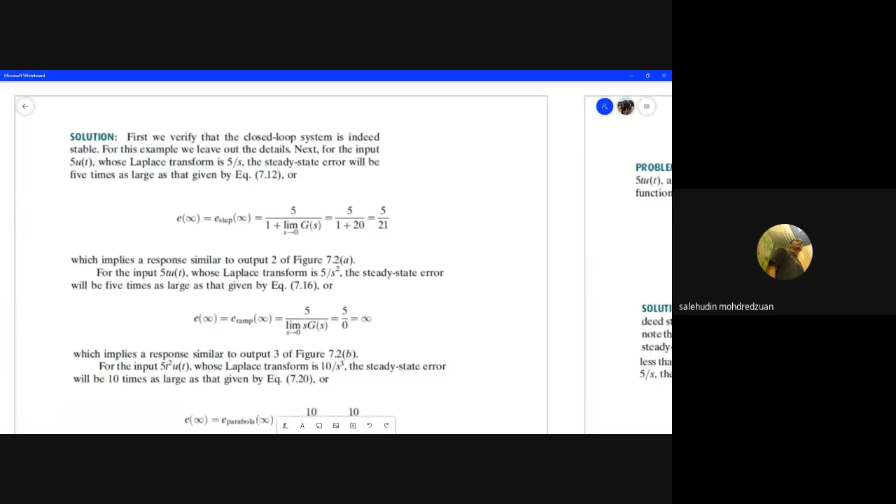Okay, ada soalan tak? Aina? Tak ada, madam nak tanya satu je. Ya Din? Kalau jenis type GS ni, kalau kita tengok gambar rajah dia, nak tahu type GS memang dia punya gambar rajah dia ada satu tu je, macam contoh 7 tadi. Mana? Ataupun untuk yang tadi slide, yang example. Ni ke? GS. Ni ke? Yang macam ni je.

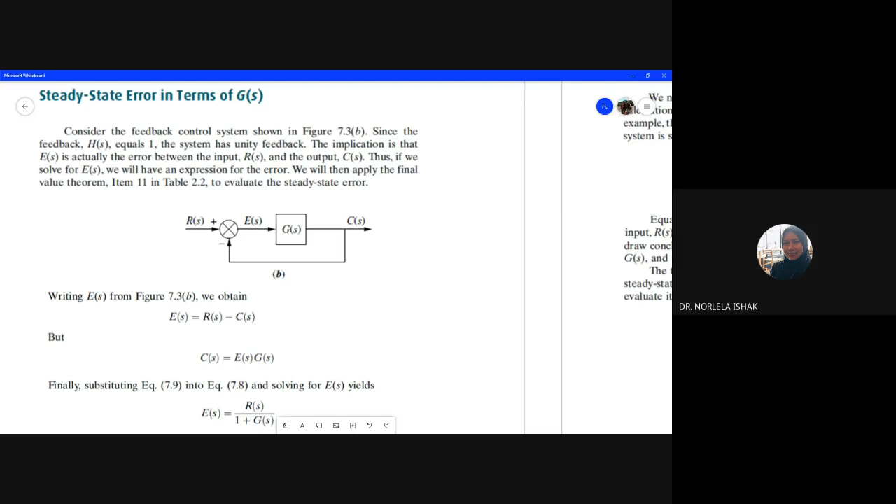Okay, let's say dia depends. Kadang dalam soalan dia mention apa tau, forward gain sama dengan apa-apa with unity. Dia akan mention dalam soalan with unity feedback. Kalau unity feedback maksudnya ni lah, macam ni lah block diagram dia. Okay. Maksudnya untuk kira error, kita kena represent sistem kita in unity feedback.

Okay. Kalau soalan tu dia beri dalam non-unity, let's say lah dia bagi dekat bawah ni ada lagi satu, so dia buat H, S, katakan dia bagi apa? 10, S plus 1. Okay, kalau macam ni, then kena convert kepada yang G prime tadi tu. Ingat tak yang madam ajar tadi? G prime, formula. You kena apply formula G prime tu, baru boleh kira error. Faham tak?